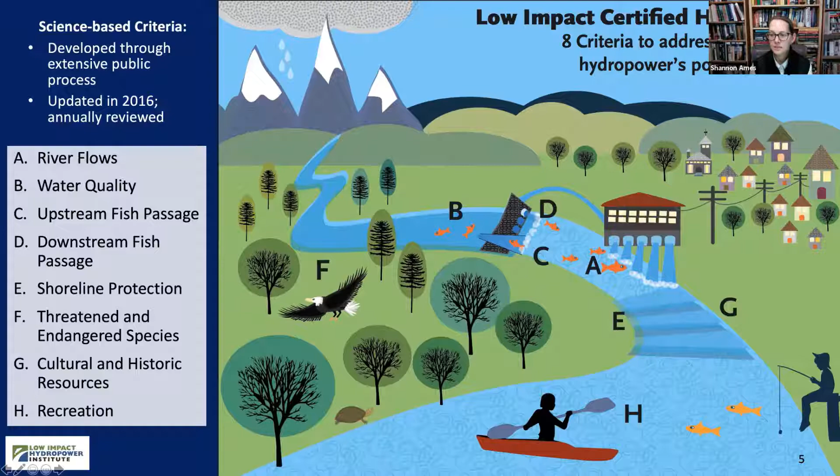The final thing that I'll say is that LIHI has specific goals and outcomes that we're looking at when we evaluate each of our criteria, and those are what is most important to us.

We often get asked what's the difference between LIHI certification and Federal Energy Regulatory Commission licensing, which the majority of hydropower facilities in the United States are licensed by, or FERC. FERC is mandated to balance energy needs and environmental needs, so those are balanced and looked at equally.

We, however, don't have to do that. So we concentrate on environment, and that is basically where we put our fingers on the scales. That, plus our yearly accountability and our transparency, I think is what sets us apart. That, plus we're not required for a hydropower facility to operate.

And with that, I will turn it over to my colleague, Whitman, who will talk to us a little bit about the types of hydropower and other minutia.

Thank you, Shannon. So we talked about low impact hydropower. We'll transition a little bit to hydropower more generally. There are two different types of facilities: conventional or conduit facilities. A conduit facility is not going to connect to a natural waterway.

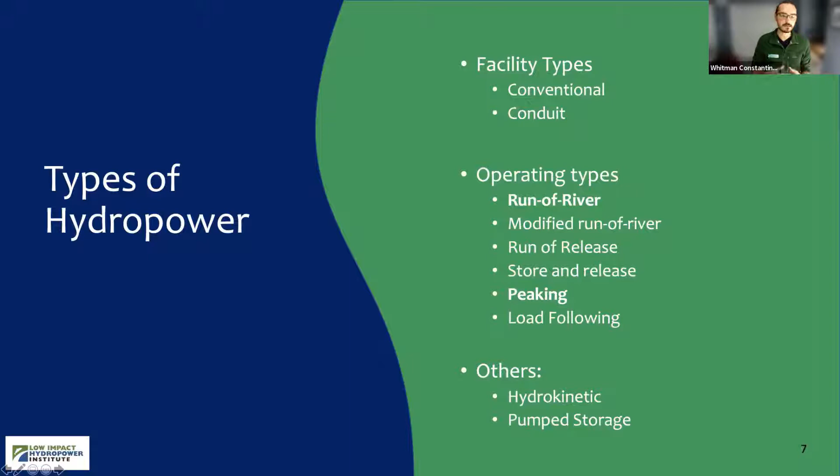Then, when electricity demand and prices are low, late at night or on the weekends, the same turbines that were generating power are reversed, sending water from the lower reservoir back up to the upper reservoir. It's a system that utilizes more energy to pump that water from the lower reservoir to the upper reservoir, but it helps mitigate peak electricity demand and supports the integration of other renewables.

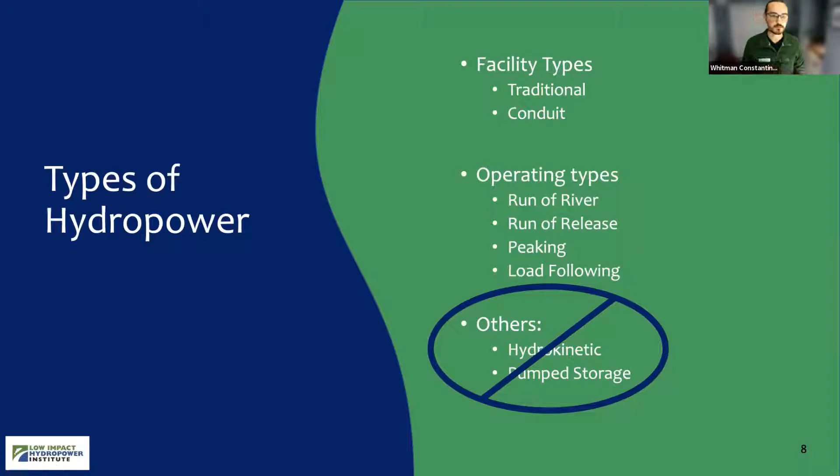Our program does not certify marine hydrokinetic or pumped storage hydropower facilities at this time.

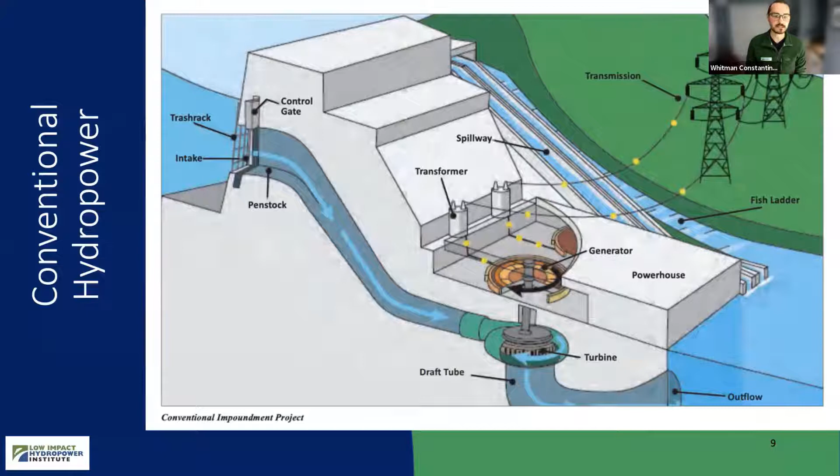As our energy grid transitions to a higher mix of renewables, especially intermittent ones, it's really important that hydropower is there to support those sources of energy, since the wind doesn't always blow and the sun doesn't always shine. It helps support solar and wind via baseload power, so power that can be generated 24 hours a day, 7 days a week, 365.

So it helps the integration of those sources. It helps keep our grid reliable and stable, and can help mitigate seasonal highs and lows of generation capacity. So despite changes in weather patterns or changes in our climate, hydropower operators are able to use long-term averages of water flow and current weather data to predict operations and availability of generation.

So we'll transition into a tour of some of the hydropower facilities in the LIHI certification program. The first of which is one of our earliest projects, LIHI certificate number 15. This is the Bowersock Mills hydropower facility in Lawrence, Kansas. This is the second of their powerhouses on one bank of the river.

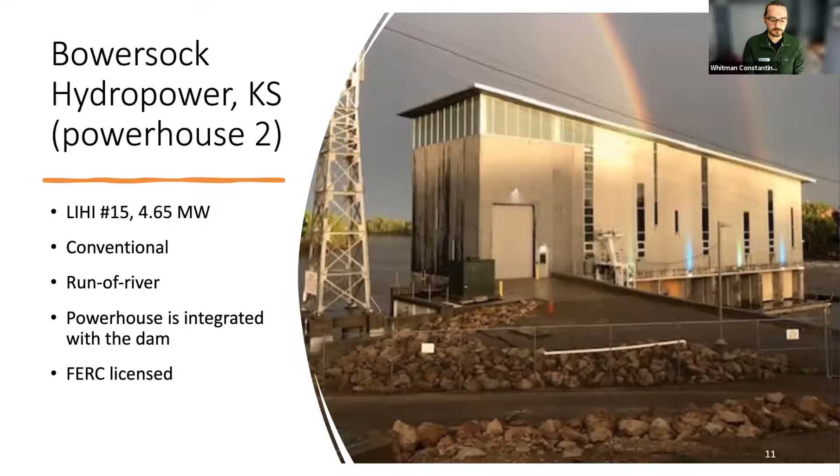It's a family-owned facility, currently in their third generation of ownership. They started as a power source for a mill in the area and then was rebuilt as a standalone generation facility. This one is just under 5 megawatts in capacity. It's a conventional type facility, operates in run-of-river mode, so inflow matches outflow from the facility. And then on the opposite bank of the river is the original powerhouse, just under 2.5 megawatts, again a conventional facility, run-of-river mode. It also serves as a municipal drinking water supply reservoir, which is created by a dam.

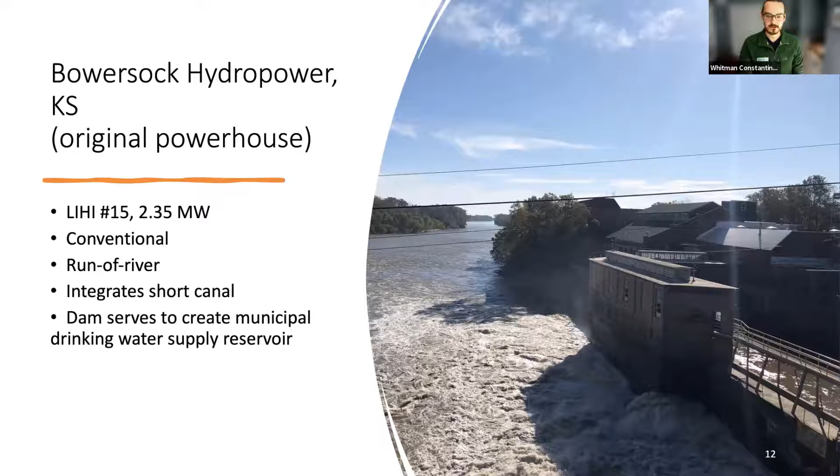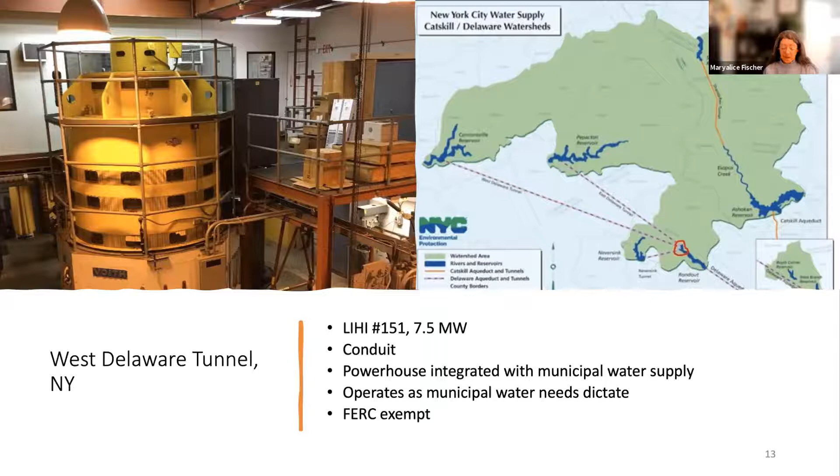This next slide, please, Whitman. This is an interesting project, Black Bear Lake in Alaska.

Black Bear Lake is a natural lake located in the Tongass National Forest. As a natural lake, there's no dam, but water is diverted from the lake through above ground and buried penstocks down to the powerhouse in the bottom right corner of the slide. The project takes advantage of the difference in elevation, or head, from the lake down to the powerhouse, which is about 1,500 feet in this case. This allows for electricity generation even on a small, low flow stream, and it has very few environmental impacts because of the high elevation. There are no migratory fish species there. Because it's a natural lake in a pristine environment, the water quality is good, and the hydropower project doesn't change that at all. The land surrounding it is all national forest, so it's already protected. Those are just some of the ways that this project was able to be certified.

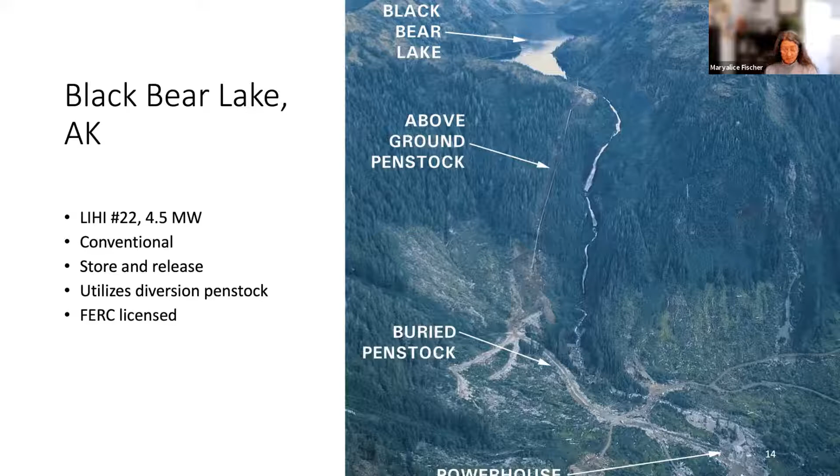On the next slide, please. This is an interesting project, the North Umpqua project in Oregon.

It's large, almost 200 megawatts, and it's made up of a system of multiple dams and canals to deliver water to 8 different powerhouses. It's located on the North Umpqua River, as well as 2 tributaries to the river. All the projects are owned by the same company, and they're operated remotely in tandem so that inflow from the upstream-most plant dictates flows coming into and out of the downstream plants. They can do this remotely, which helps them optimize their generation and the amount of flow managed through the system, as well as the timing of that flow, while also in a coordinated fashion managing the natural resources they steward, including water quality, fish passage, land protection, and recreation, among other things.

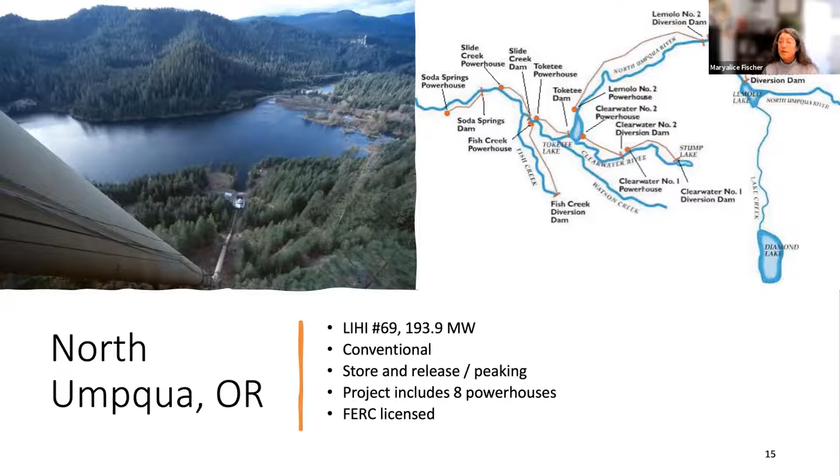Next slide, please. So there are some ways where hydro owners can both improve their operations to maximize their revenues and generation, as well as take steps to protect or improve the environment at the same time. A lot of these types of upgrades can be accomplished without creating new environmental impacts and without worsening existing environmental conditions.

I'll give some examples in a minute, but incremental generation upgrades can include a new turbine or a refurbished turbine, replacing parts of the turbine, rewinding a generator, or control upgrades. A lot of hydropower projects in the US are rather old, and over time their mechanical equipment gets fatigued and needs replacing or refurbishing. So those are one way of doing upgrades.

Another way to increase operational flexibility or availability can include replacing capacitors that improve or increase voltage stability, installing variable speed turbines that allow for generation over a wider range of flows, so electricity can be generated at a lower flow or a higher flow than a standard turbine. Dredging, I'll talk about in a minute, and gate modifications as well. All of these things lead to optimizing the amount of water available for generation.

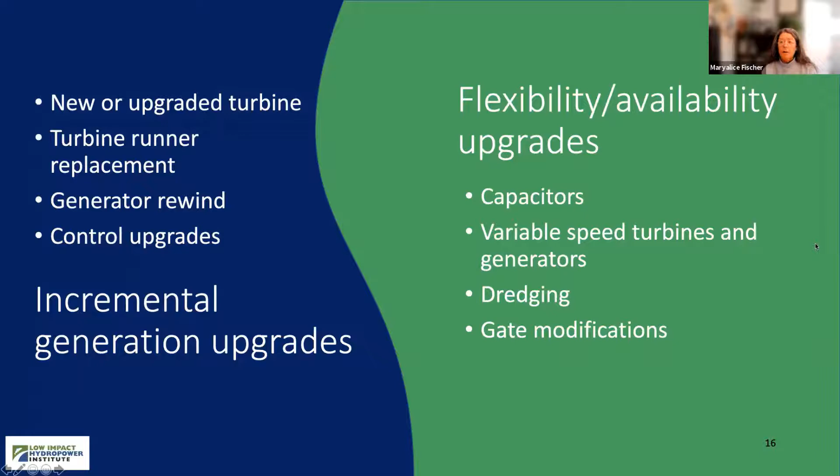So next slide, thank you, Whit. This again is the Bowersock project that Whitman described. In this case, they dredged over time in a river, the Kansas River, and there's a lot of sediment that naturally flows down the river. That sediment can build up in front of dams or in canals in front of intakes to a powerhouse, reducing the area through which water can flow into the turbines. So periodic dredging helps maintain the maximum area for water to flow through. In this case, as they were dredging, they also were collecting fish that had been in the canal, including this very large channel catfish.

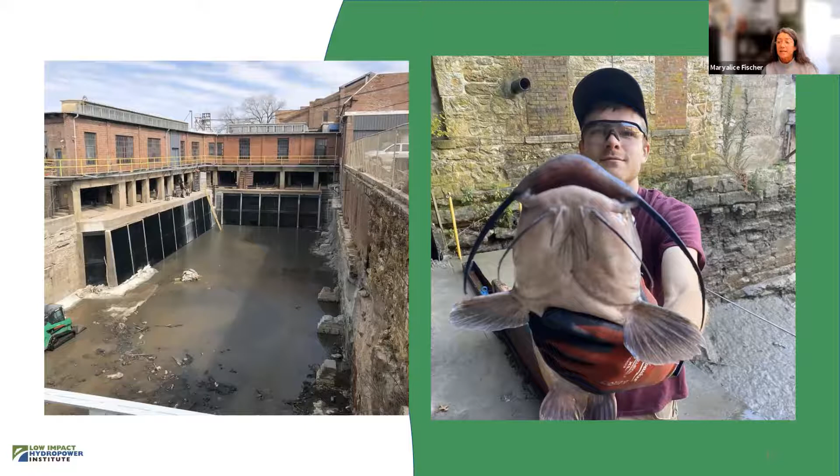And they rescued that and moved it before they finished draining the canal.

Some environmental improvements, though, do result in less generation. It's not always that you get both increased generation and improved environmental conditions.

Reducing generation can happen in a whole bunch of ways, but one common one is when a project provides fish passage. A fish passage facility requires water flowing through it so the fish can survive, and also to attract them to the fish passage. So some water that normally would have gone to generation is now diverted around to the fish passage.

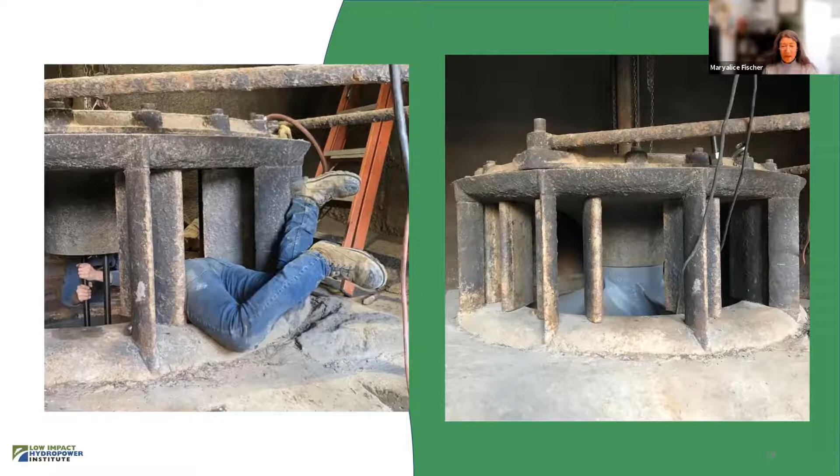Thank you, Maryalice. So I wanted to end with one interesting thought. As Maryalice mentioned before, hydropower is old, and many of the facilities we've certified are over 100 years old. Hydropower generation has basically been around as long as electricity has been, and even before that, when the power of water was used to turn mills, grist mills, and grind flour, etc. So there's a common misperception that no changes are happening, that hydropower is as efficient as it will be, and that there's not a lot of innovation happening.

So the company I'd like to talk about is Natel Energy. They are a relatively new company looking at two very interesting things. The first, on the right-hand side, you'll see fish-friendly turbines. This brother-sister team founded the company, and they have invented a turbine that's highly efficient. But when they set out to design it, they also set as a criteria that the turbine would pass as close to 100% safe passage for fish as they possibly could. Their goal was 100% fish passage.

I do believe that with recent data, they're as close as something like 99.8% survival of fish, and that's extraordinary. We do have a facility that we certified earlier this year, the Freedom Falls facility in Maine, that's utilizing one of these turbines, and we look forward to tracking them over time and for more of these turbines to be installed.

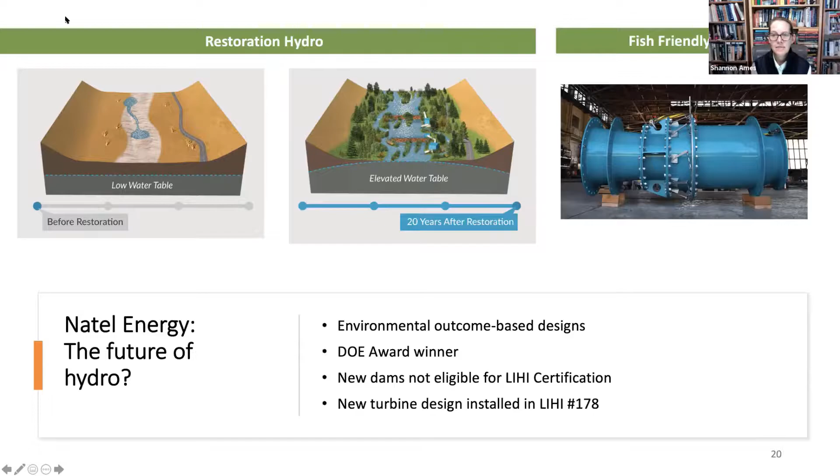Next slide. I wanted to just leave you with some resources. We do encourage you to visit our website. There are many resources available there, including a page on every certified facility and the whole history of applications, reviewer reports, conditions, and statuses. There's a map showing the facilities, our handbook, program details, a library of published materials and interesting links. Our board members are available there, and our contact information is there. So we encourage you to visit the website, but we also encourage you to reach out to us. We're happy to talk about low impact hydropower anytime to anyone.

And with that, I'll turn it back to you, Ashley.